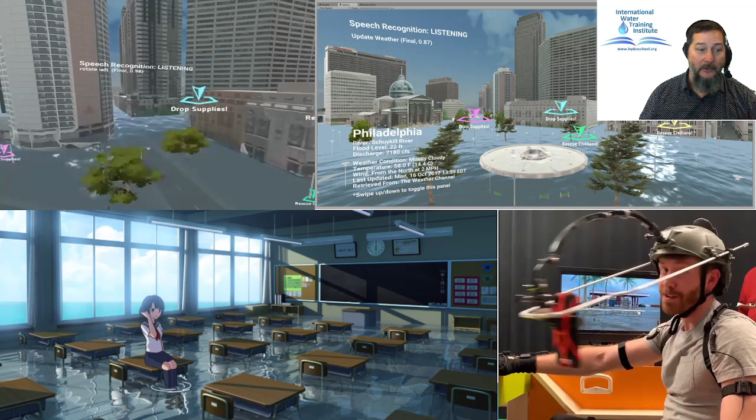One of the things I'm going to try to do with any upcoming courses is bring along a virtual reality headset that can take any flood you create and then use Google Earth or other tools to see the flood levels around you, using results exported from our own tutorial models. There are some exciting applications like this that were featured in our technology webinar last December, and I'll provide a link to that as well.

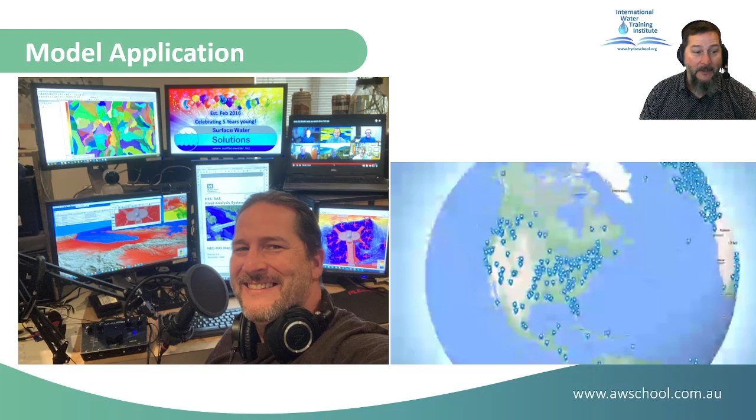Now, this being an online course, we're a bit limited for using shared visualizations. This map here shows our flood modeling webinar registrations alone, and it shows the variety of places that you may be watching us from. So wherever you're joining us from around the world, I'll try to keep this next example simple enough where each of you could do this on your own.

I'm coming to you, as you see here, from a small room that's packed full of some really nerdy stuff, but it probably wouldn't be very interesting to model in hydraulic software. So I thought I would go back to one of our earlier course locations and show you what we did there. Hopefully this location that I chose is a bit more interesting than the room I'm sitting in right now.

It's from a few years ago. I did a course in New York City, and we could actually see the Empire State Building out the window. So I'm going to use that as my example here. You can see Central Park and a few other familiar landmarks: Carnegie Hall, Rockefeller Center, Radio City Music Hall, Times Square, and there's the Empire State Building.

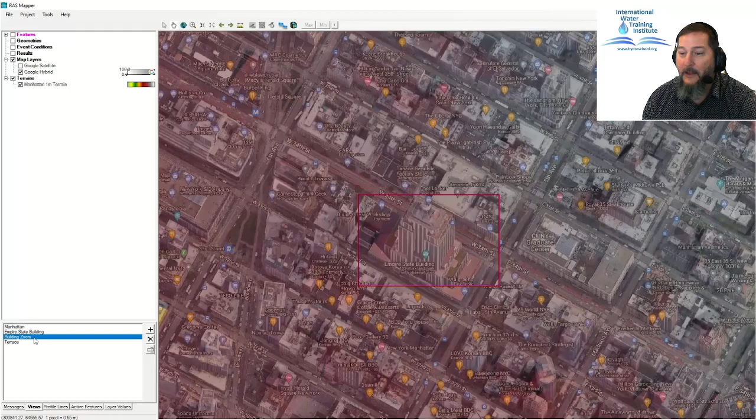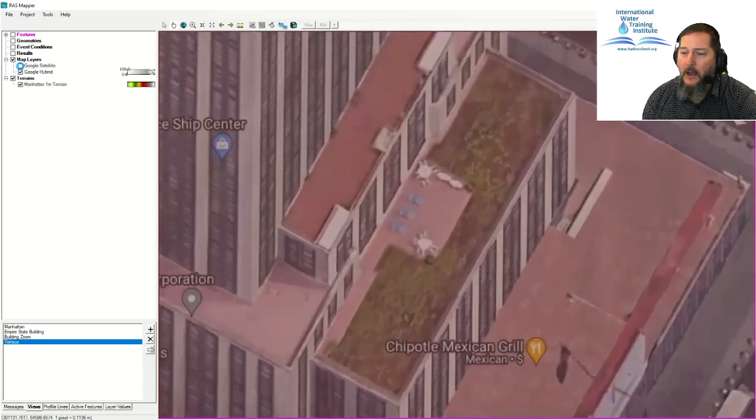So let's zoom in on that. I've set up some saved views here, and we'll go to the Empire State Building itself, which you can see. Sitting in one of these boardrooms in our class, we could actually see the Empire State Building, including some of the terraces on the side, which I wasn't aware of before I went and toured it a couple years ago.

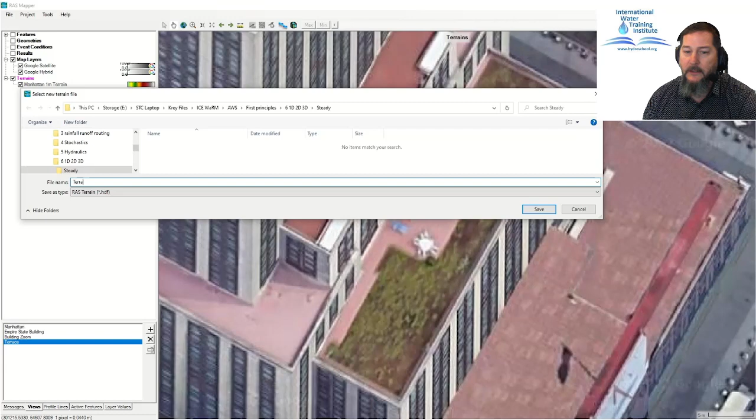So zooming into one of these terraces, let's go ahead and model this as if it's the classroom. This might be a little more interesting than just a box room. If I just delineate around the outside here, I'll need to pick an elevation. Now, I have terrain, but even if I didn't, I'm just going to create an empty terrain here. This is just going to be a new terrain layer that's only what I assign here.

So I'm going to call this the terrace, and I'll go ahead and add a new modification layer to it. In this case, it's a polygon, which I'll also call the terrace. As I draw around the outside of this, I'm going to take this polygon, and I'll have to assign an elevation to it, which will override anything that might be underneath it.

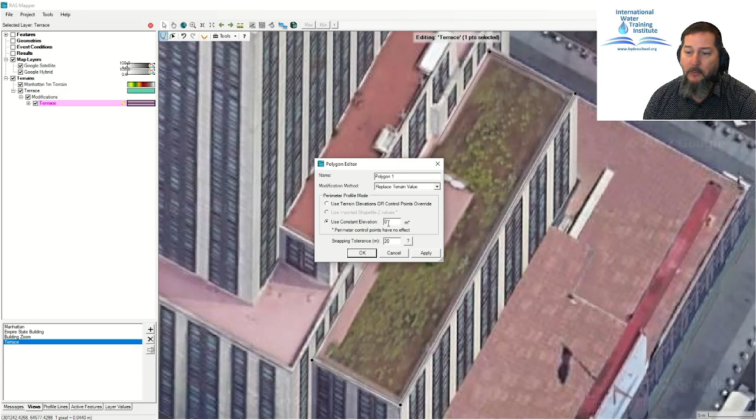In this case, it's its own terrain, so I'm not going to give it a name, but I will give it an elevation. We're about 30 floors up, so 100 meters. I'll call it even and say OK. So I've got this 100-meter high polygon.

Now what? Let's go ahead and make a geometry. I'll start with 1D, adding a new geometry here, I'll give it a name, 1D terrace, and we're going to bring some flow in one side and out the other. So I need a flow path, starting with a river, I'm going to go ahead and draw that one in.

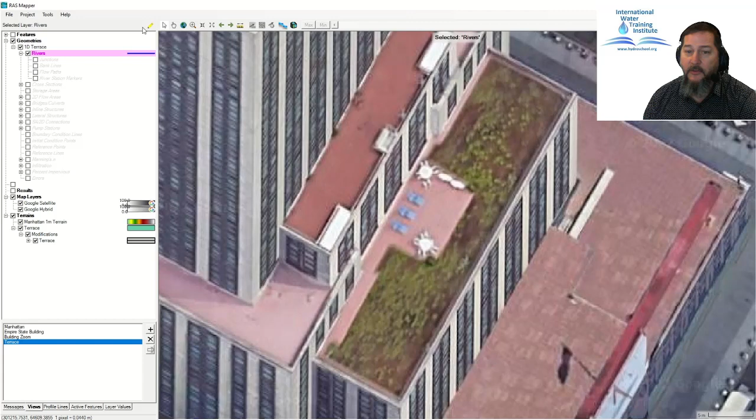And the river itself, I'm just going to go right down the center. Now this could be the center of a classroom if that's where we were sitting. In this case, I'm going to go right down the center of the terrace and delineate a flow direction. So I'll call this one terrace as well. I'm only going to have one reach, so I'll give it the same name.

Only other thing I'm going to add to this is cross sections. I'm going to keep this as simple as I possibly can. I'll put in a couple of cross sections here, delineating from left to right, looking downstream, one at the upstream end, one right down the center here, and then I'll do another one at the end. See if I can get as close as possible to the end.

Oh, that's one. Let me go ahead and move that over. I just want to get it to be 0. I'm at 39 there. I think the line is about 40 meters long. So I'll move that around a little bit.

And again, it's numbered from downstream to upstream, but I've delineated it from upstream to downstream. So the river mouth at 0 is my chainage that way, my station, and I've got 0, 20, and 40. So these things are 20 meters apart.

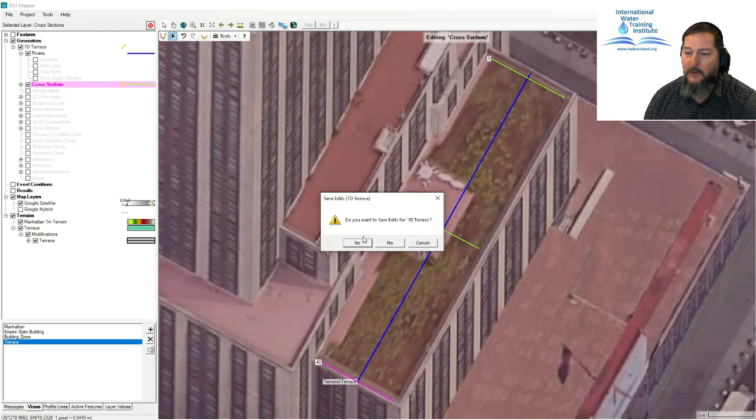I'll save that geometry, and then we'll go back in and have a look at the geometry and see what it looks like with that 100-meter high terrain surface and polygon underneath it. So when I open this up, let's see what we see here. There is the terrace, and I've got my 3 cross sections.

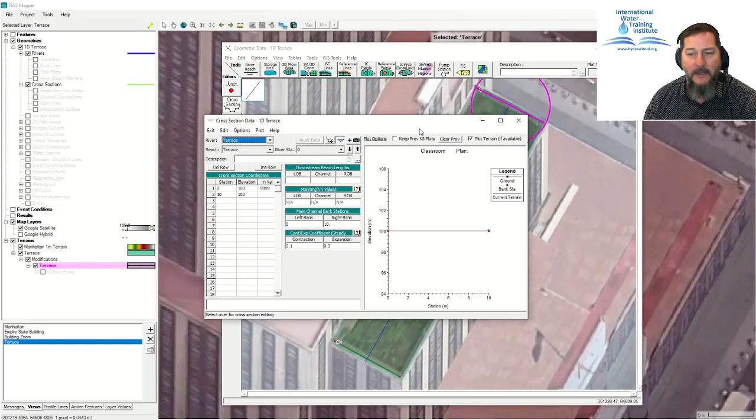Now they don't have any elevation. Each of these cross sections, they have elevation, they just don't have a slope. So they're at 100-meter elevation, each of them, and they're just dead flat. They'll get walls on the side that are automatically going to get drawn, but my profile is just dead flat. That doesn't help us much.

So we want some slope to this. Manning's equation, if we want to compare it to Manning's equation, would fall apart at 0 slope, right? So I'm going to give it a longitudinal slope, not just for the energy gradient, but we'll also get a slope this way by adding to the elevation. We'll actually get a bed slope and a friction slope, everything parallel, so that we get some uniform flow here.

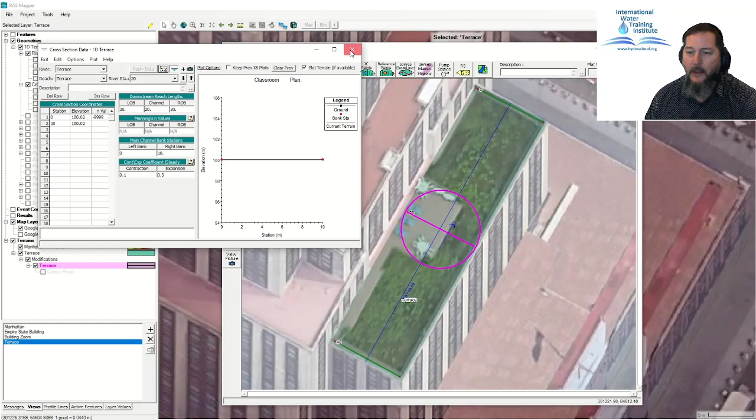So I'm going to add 4 centimeters here, because it's 40 meters long. That gives us a 0.1% slope. So in that case, then the middle one, I'm going to raise that by 2 centimeters. I'll do that manually here. And now I've got a gradient from upstream to downstream, and I will save that geometry.

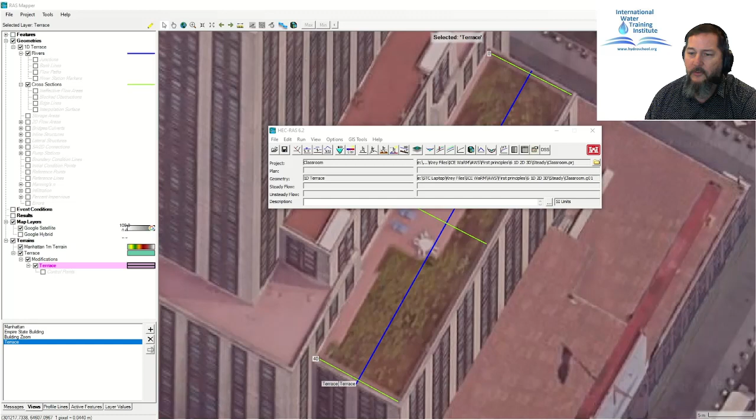Now you can see on the longitudinal slope, I've got my 0.1% moving downstream. So let's see, I'll save this as we go here, just so I don't lose anything. And then I could go in and enter steady data here. Let's go ahead and that'll be our next step.

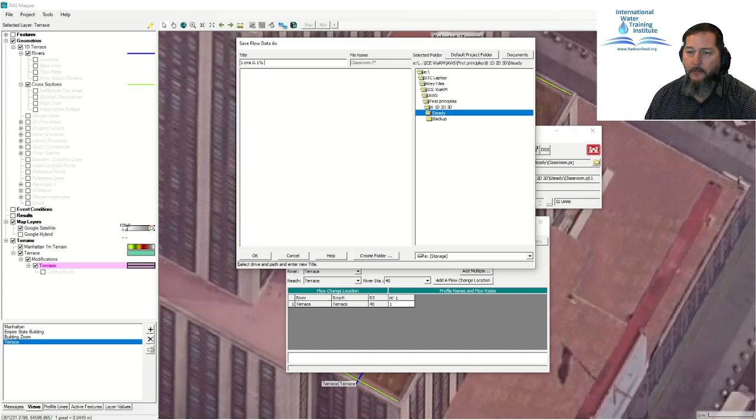Let's keep it simple, and I'll make it 1 cubic meter a second. And let's assign the outlet to be a downstream normal depth gradient of 0.001, so 1 meter per 1,000 meters, or a 0.1% slope. So I'll assign on the name, I'll give it a name that includes the flow rate and the slope, just so I make sure I keep this separate in case I make any changes later on. So 1 cubic meter a second at a 0.1% slope, and that's my steady flow.

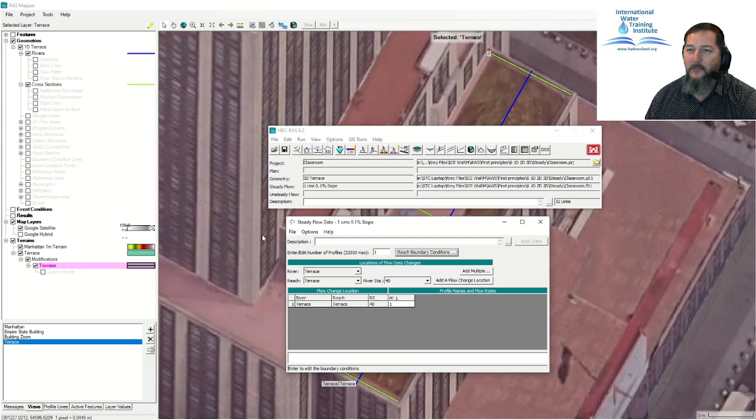So let's see, there's one thing before I run this. I guess one thing we need to talk about is the roughness. So I haven't assigned the roughness coefficient yet in this model, and so I'll need to go back in and do that. What should we make this out of? I don't know, smooth dirt, grass, turf, astroturf, whatever they might have out there, some gravels. Let's just choose an intermediate value.

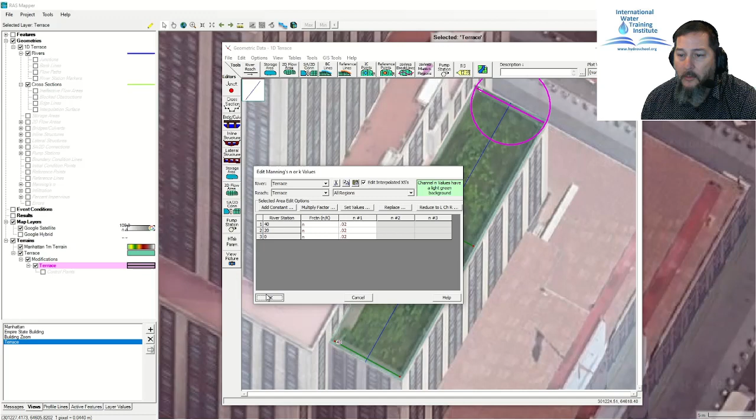So I'll need to click on the geometry here and open up the cross sections, and I'll do it through the table. It's got a no data value assigned to it to begin with, so we'll make it 0.02 friction. We can look up the tables to see what might be reasonable and run some sensitivities, but we'll keep this pretty basic for now.

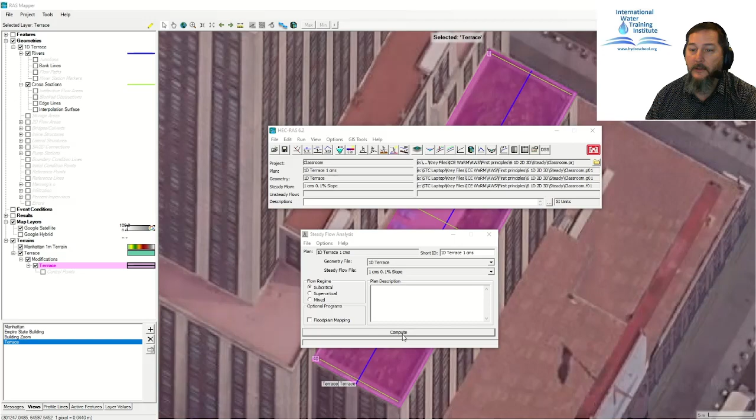So I can see now, if I turn these on, there are 3 different cross sections at 3 different elevations, 3 different levels. I'll save my geometry, exit out of that, and let's compute it and see how quickly it goes, because that's one of the things we're testing today, the speed. This one took less than 2 seconds to run, so almost instantaneous.

Let's look at the profile now, and you can see I've got a slope there. Now that should be parallel, but I've only got 3 cross sections, so there might be a few discrepancies in terms of how parallel that is. It's dead flat across the top.

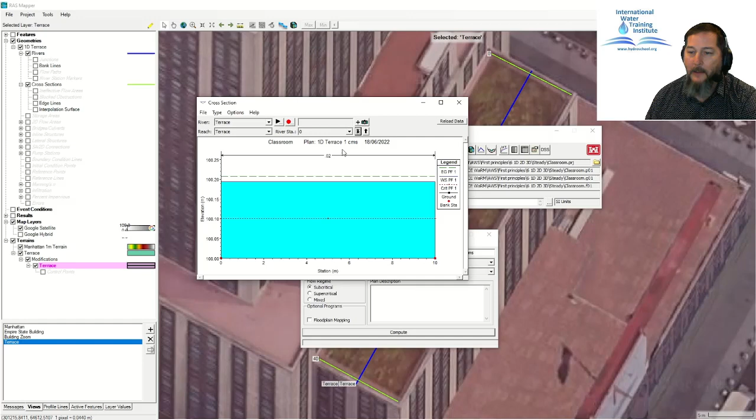You can see that I'm below critical depth there, so this is a subcritical run. There's critical and my water surface, and if I check the tables here, I can see my Froude number is 0.37, and the water surface is about 20 centimeters deep, which we can check later to see if that makes sense. Velocity is 0.5 meters a second.

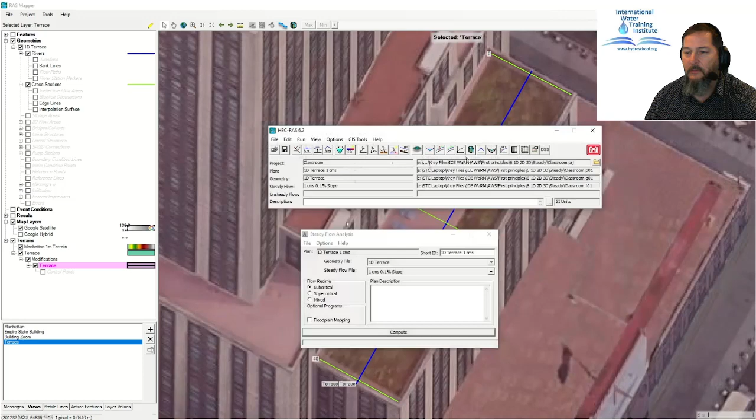So that's my uniform rectangular channel running down, with water pumped in from the upstream end and flowing out the downstream end at a 0.1% slope. So there's my depth, and you can see that flow profile in the results.

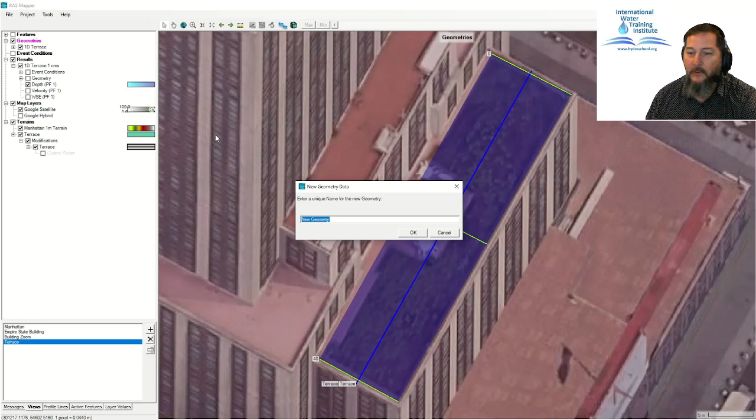And now let's go ahead and do a 2D terrace to compare. In this case, I'm going to add a grid around the same area, and for the perimeter, I could just make a shapefile out of this and use the same one that I had used to delineate my 100-meter high elevation.

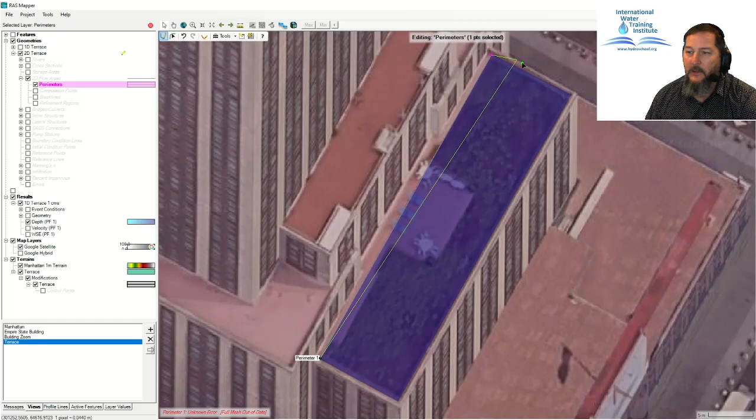I'll just fudge it in here and get it as close as I can. In this case, this becomes my 40-meter by 10-meter terrace that I'll run some flow across. So the perimeter itself is going to get the same name. I'm going to keep this as large a cell as I can, just to demonstrate the purposes here.

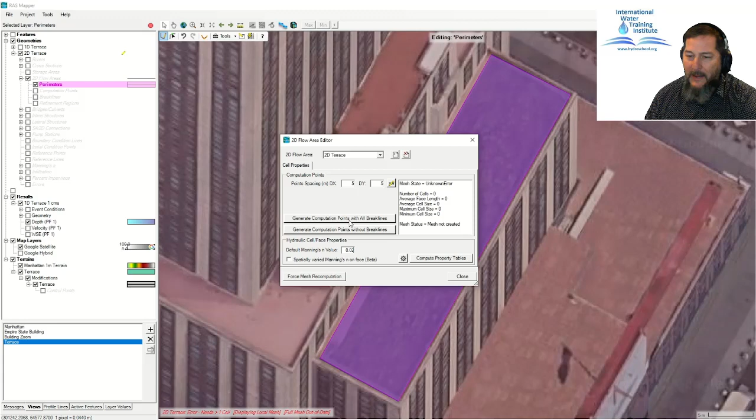I'll make it 5 meters, match the Manning's n of 0.02, and we'll generate this. This is not going to come in orthogonally, but I want to make sure it's oriented in line with the same flow direction as the 1D model.

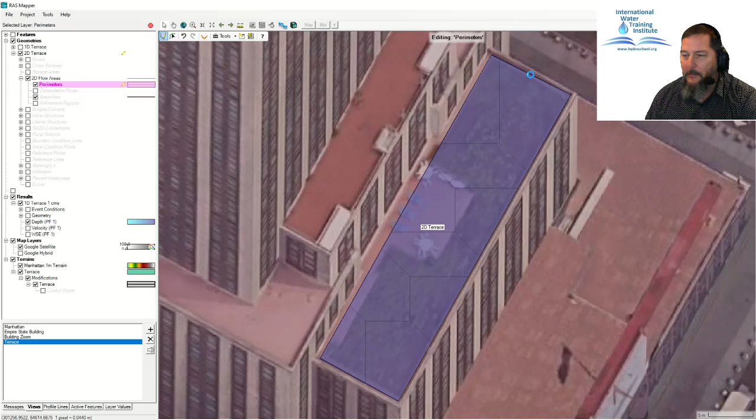So I'm going to go ahead and put a break line down the middle of this, maybe just for reference. I'll use the 1D alignment here and turn it on so I can match that. So again, I'll take a break line right down the middle, and I'll give it a name. This is going to be the center line of my terrace, and now I want to orient everything along it.

So what I'll do here is give it some near repeats, because near repeats will allow us to orient in any direction we choose instead of being orthogonal, even though it looks like it's 3D. So I'll give it a few near repeats.

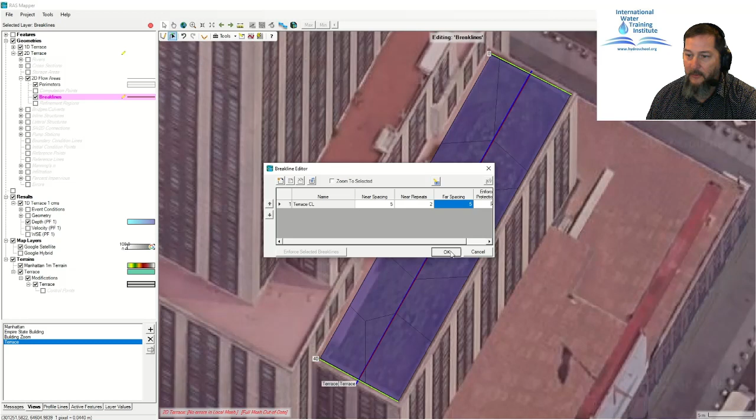Far spacing I'm going to keep the same, and we'll enforce that here and see how many we get. The dots, let me just remove those couple in the middle, so that we can get this thing lined up the same way as the cross-section alignment.

So now I've got 1, 2, 3, 4, 5, 6, 7, 8 on one side, 8 on the other, 16 grids. Not necessarily a robust 2D model, but this should give us enough to compare to when we look at the 1D results.

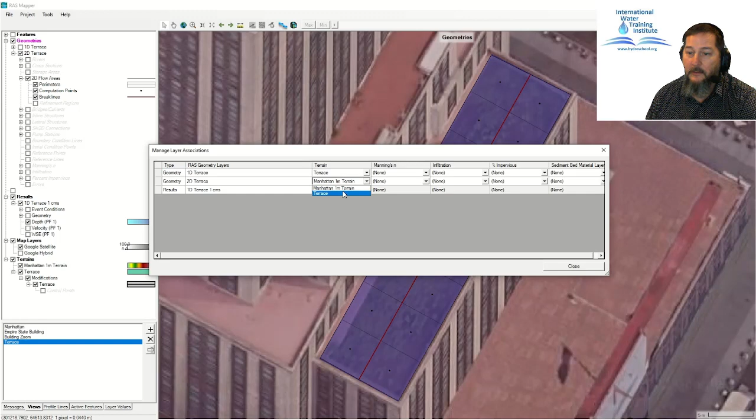So for our 2D flow area, let's go ahead and associate this with the proper terrain in the background. This is now going to be the terrace terrain, not my ground floor terrain, which is what I've got as the basis for the rest of the model. This is just that 100-meter high grid.

So as I scroll along there, you can see the elevations vary. I've got varying elevations that are 4 centimeters higher on the upstream end, and now that I've associated it, it's automatically going to use that one.

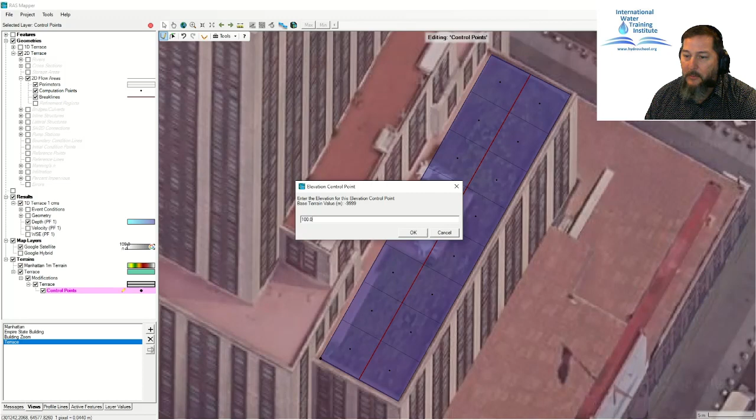Again, now I need to assign control points along the outside here, and I'm going to put those in at 4 centimeters higher because I just realized I hadn't sloped this yet. So I'm going to give this a slope.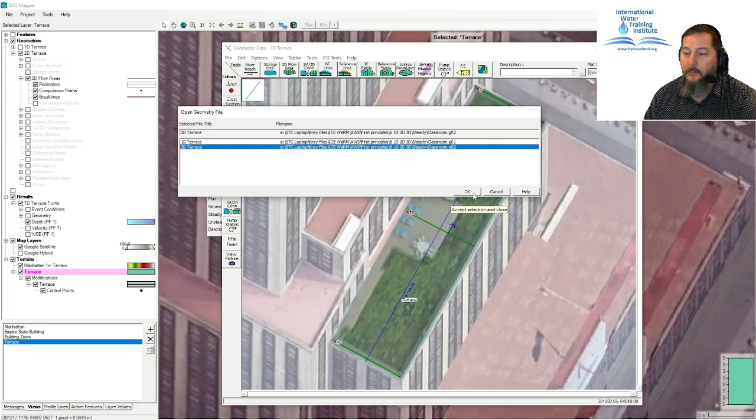Those previous elevations were even, yeah, now there we go, 2 centimeters in the middle and exactly 100 at the end, so I'm 4 centimeters higher. And I've done this with control points. This way, if I open up the 2D geometry, we'll be able to see how that has now been sloped, so that 100-meter surface is tilted upwards with a 4 centimeter rise, a 0.1% gradient underneath it.

So those cells will then be computed based on that terrain data. Now I need to add some boundary condition lines, the upstream and downstream boundary condition lines, inflow coming in from the bottom, outflow going out from the top right there. And if I pull this across and give it a name, I'm going to assign the same slope on the upstream and downstream side.

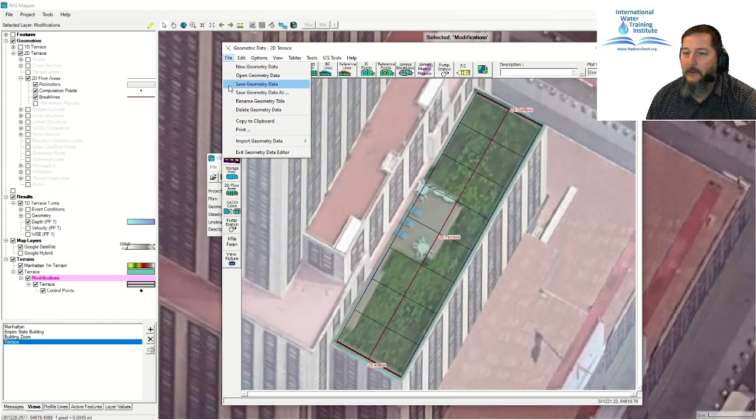Let me save this, I always like to save the geometry along the way. You just never know when you might lose it. And I will save the plan as well, and the steady flows as soon as I get those in.

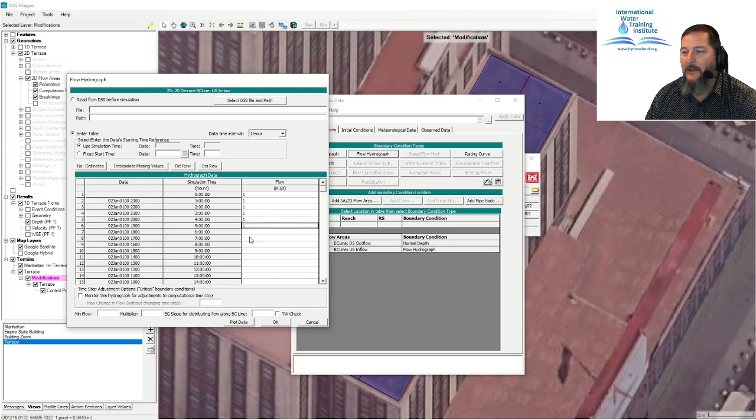So normal depth on the downstream side is going to be 0.001, again 1 out of 1,000, and then the same on the upstream end. I'm going to bring in now the 1 cubic meter a second all the way down. This shouldn't take long - how long does water take to go 40 meters? I don't need to go out to 5 hours, but I'll put those numbers in case I extend things later on.

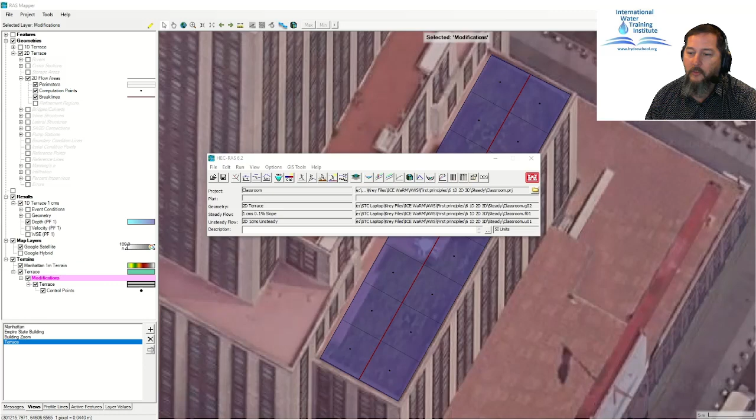So I'll save that unsteady flow data. Let me give it a name here - this is going to be, again, 1 cubic meter a second, and this is now unsteady. So I've got to run an unsteady - I don't have the option in 2D of running a steady flow. So now I've got an unsteady 2D run to compare my 1D steady flow results to.

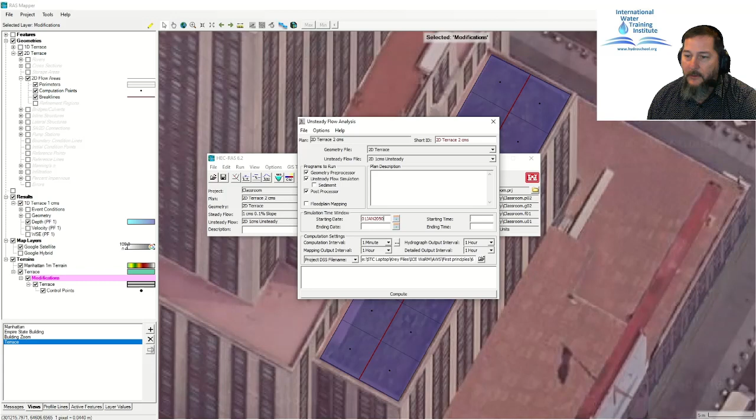So I don't need the post-pro. I'll just put all these on for the sake of consistency with the others, and I'll make this my 2D terrace, and we'll put this flow in. I'll just copy this across to the short ID, and we will run this one. I'd like to put these in the future after my retirement, so I know it's a hypothetical event, and we'll just run this for 2 hours, much longer than we need.

So what's going to happen here if I save this - well, let's see, 1 minute. If we think about our Courant criteria, that's going to be quite long, so this thing might blow up on me. Yep, let's look at that - 147% error. Yes, that was way too long for a 5-meter grid. I can't go with 1 minute, so let's change that.

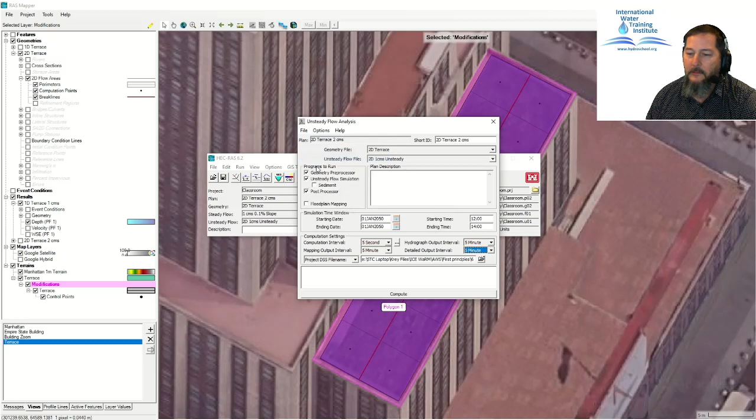Thinking about how far it might go, how fast is this going - 0.5 meter a second. We'll give it a Courant number of less than 1 here, and just allow it to move from one grid to the other, and see if that makes a difference. I'll change my output a bit so I can see this cycle through as well, and we'll save that and compute it. Now we've got a run that hopefully has got - yep, smaller mass balance error, pretty much negligible.

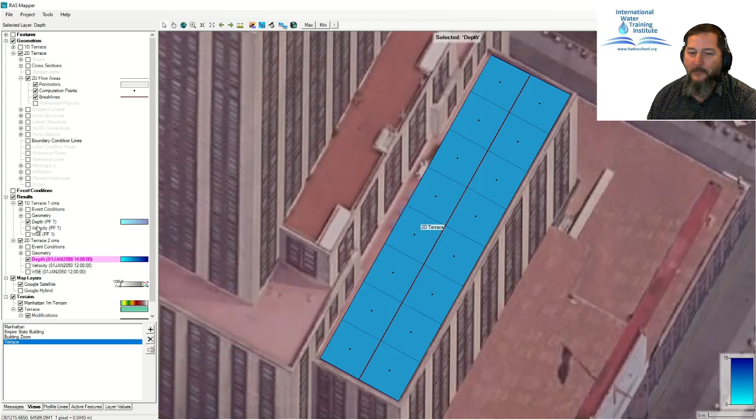So now I've got 2 sets of results that I can compare, based on this 2D model. It's not great - it's got 16 grids. How many 2D models have we ever built that only have 16 grids? But as it's cutting these sections for a rectangular uniform channel, it's going to be just fine.

So here's my flow paths, my particle tracing - you can see it running from one end to the other. Again, a bit gimmicky in this case, but it does show us the flow directions. So I should have called this 1 cubic meter a second - I'll go ahead and rename that in a bit here. But let's try running it.

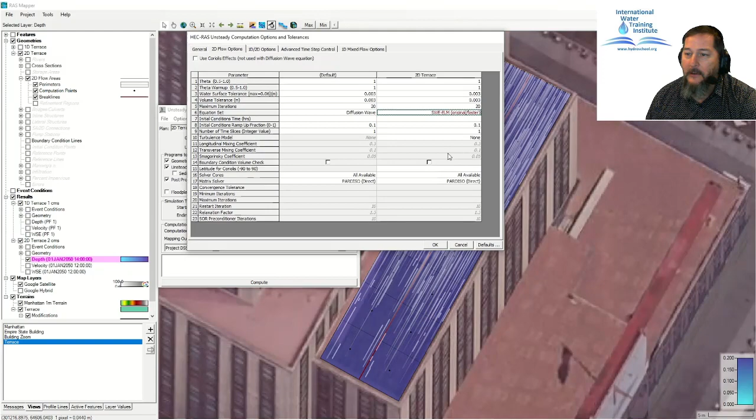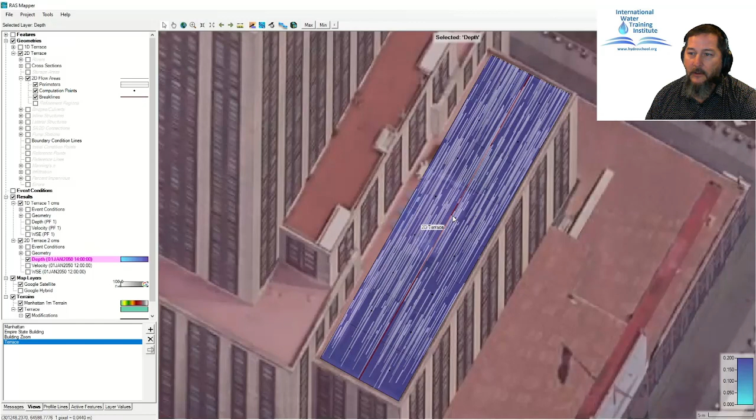That was diffusion wave, the simplification, just to prove to ourselves that it doesn't make a difference. My depths were 19 centimeters before. I'm going to run this now as a full momentum, the shallow water equation, and let's see what we get. We got a little bit bigger mass balance error, but when I check the results - let me turn off the particle tracing - it's still 19 centimeters deep. Same thing, it didn't make a bit of difference whether we ran full momentum or diffusion wave.

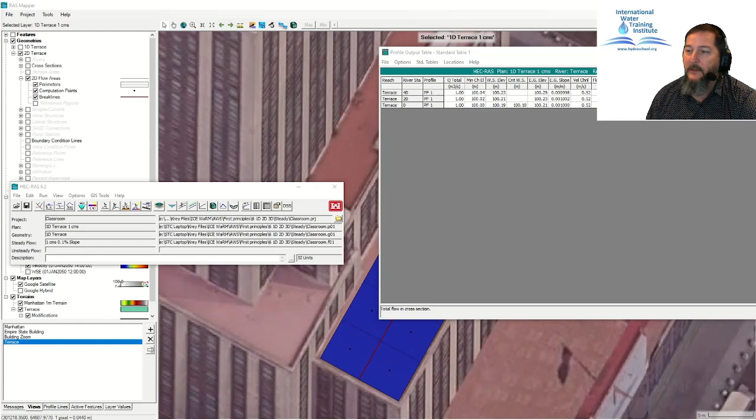And likewise on the velocities, those are going to be consistent at 0.53 as well. Oh, for the 1D, let me go in and check, and we'll go back and compare that to the table - you can see, oh, the velocity is 0.53 instead of 0.52. You can see how the depth's changing a little bit there. If I inserted more sections, that'd be the same.

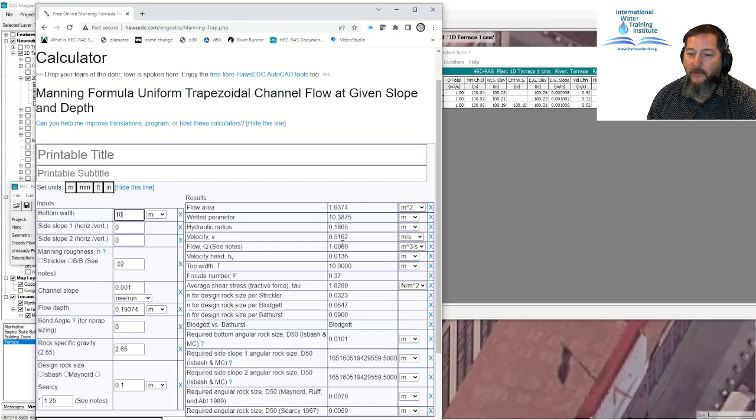Let me just type this in - I've got these values that I already put into an online Manning's calculator, and you can see with 1.0000 discharge in my Q and the same channel slopes, I get 0.19374. So that just shows us that we're matching. The velocity, yeah, 0.52 - so we are right on. How well do we ever know things to 1% or less?

That's probably more accuracy than we're likely to find anywhere else. And again, there's going to be more uncertainty in our Manning's roughness.

So let's go ahead and now change this 1D to an unsteady. I'm going to go ahead and save the unsteady data here. Instead of 2D, this is now going to be 1D. Let's see if our steady flow and unsteady flow give us any differences.

So I'm going to give exactly the same boundary conditions as I had for my 2D model. Now I've got 0 at the downstream end. I'll give it the normal depth, again 0.001, that's 1 in 1,000. And then at the upstream end, I'm going to give it the same thing, the flow hydrograph.

What if we wanted to ramp this up? I think we've talked before about how flows need to ramp up gradually in HEC-RAS. It doesn't like to just start with a massive amount of flow. Well, what would happen if we just ramped it from 0?

I'm going to save this one and also save the plan. This is going to be a 1D model with unsteady flow. I'll put that in the short ID as well. And then we'll have this one saved.

I'll turn on all the same features here and try to make it similar in the run the simulation window. So going 2 hours worth.

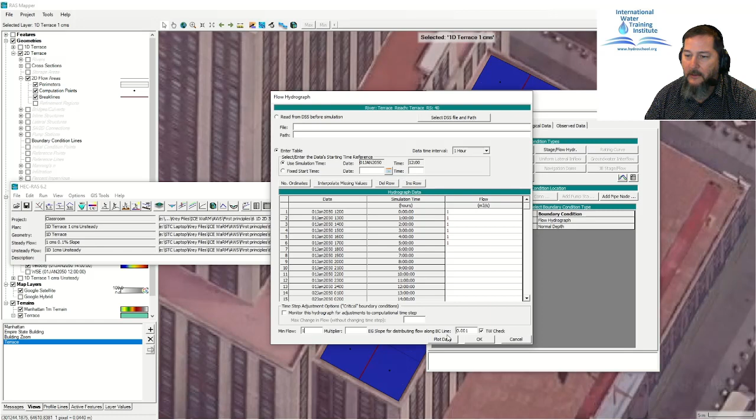You could also instead, even if you had some flows going below it in the beginning, we could assign an initial flow here. Wherever you want to assign that, we just need to override the 0. We can't have a 0 flow in this case.

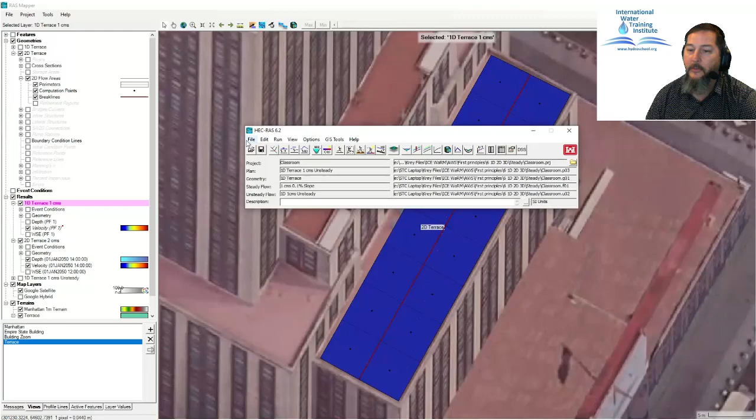And so when I now hit run and hit compute, I should hopefully get some results here that are going to be a bit more reasonable than 3 seconds. So it took a little bit longer than the steady flow, but only by a second or so.

So let's have a look at these results. Let's pull RAS Mapper back up here, and we've got unsteady results and we've got steady results. And if we have a look there, now here's my 1D unsteady. Look at that, exactly the same, 0.19.

What do you know? Well, but velocities, I think there might have been some instabilities in there. So let's go back on the velocity table, because it's going to track all of your any instabilities you might have had along the way at any computational interval, not just the output intervals. But let's go ahead there and have a look then at the table and see if we can get those results for the 1D unsteady.

Yep, it's the same. So you can see it's actually matching exactly the same for my water surface elevations as the steady run. So I've got these 3 runs, steady and unsteady for 1D. 2D I can't run as steady, so I've just got the 2D shown this way.

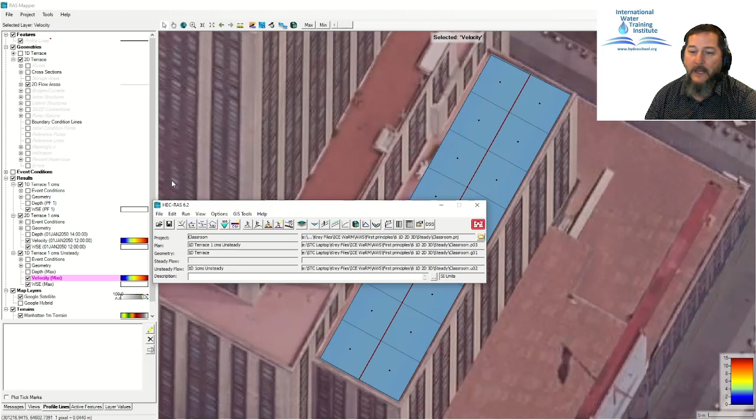Let me just save everything and go back to my results here, and then we can maybe plot a profile of this and see if we can compare our water surface elevations.

Again, there's my particle tracing, just showing the direction that it's going in. I'm going to plot this.

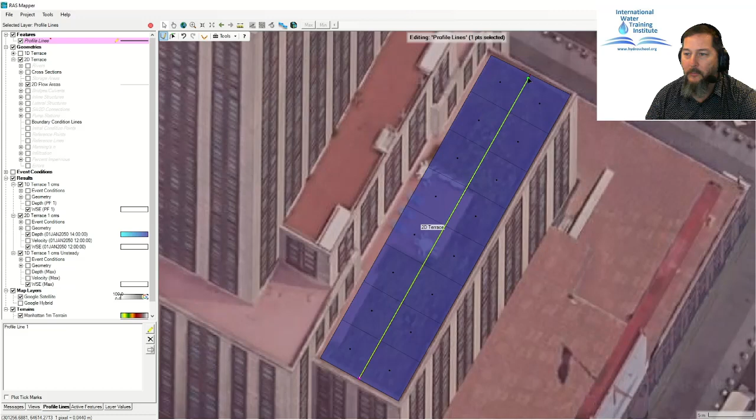Usually I like to just grab my center lines off of a shapefile and import those so that they line up exactly. In this case, I'll just fudge it in again and go right down the center line of the terrace as a profile. So when I do that, I'll go ahead and make sure I'm turning on my maximum water surface elevations.

I can check each of these 3, and when I plot them out, you can see there's a little bit of a difference. Is that because I had such a wide grid spacing and cross-section spacing?

Well, you look at those axes there, each of those grids is 1 millimeter. The fine grids there is 1 millimeter apart. So it's still pretty close. There may be some conceptual differences in how these are handled.

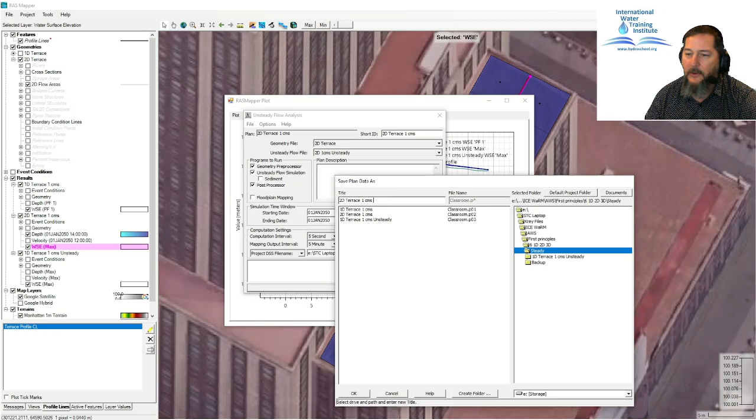You can see it's actually a bit closer right at the end. So just to check ourselves, let's see what happens if I take the 2D and maybe the full momentum versus

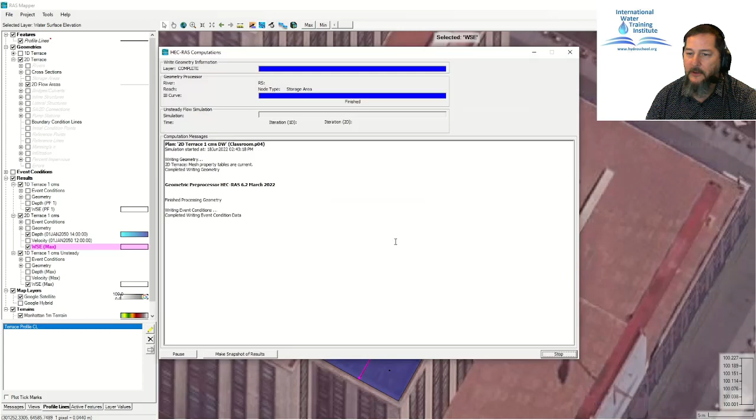diffusion wave. Let's go ahead and save that one again. I didn't save it last time, just right over the top. So I'm going to change this back to diffusion wave and call it DW. With this one called DW, I'll save this plan and run it, and now we'll have an extra profile to compare. Let's see, is there a bigger difference between 1D and 2D, or between 2D in diffusion wave and full momentum mode? Well, let's have a look here.

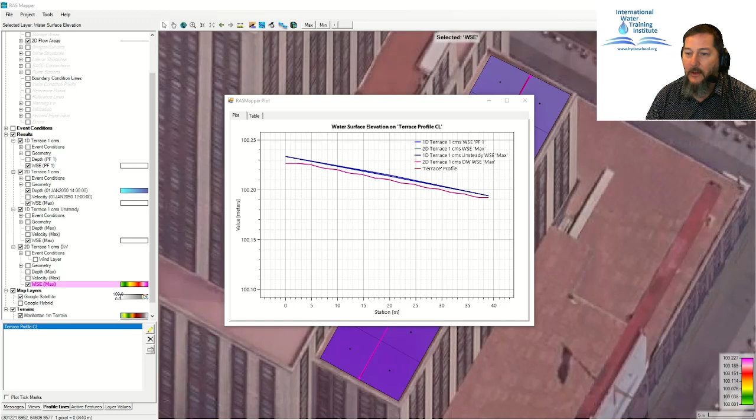I'll close that out and add that to the profiles, and what you'll see here is that my two 2D ones, I think, because it's uniform, shouldn't be much difference at all. Okay, it's not even a millimeter, so it's well within the accuracy of the model here, the reliability of the model results.

So with that, let's go back again and just look at the geometry. Maybe the grid size, maybe refining the grid size. Did we get to convergence here? Would we get to convergence if we change this, say, to a 1 meter grid instead?

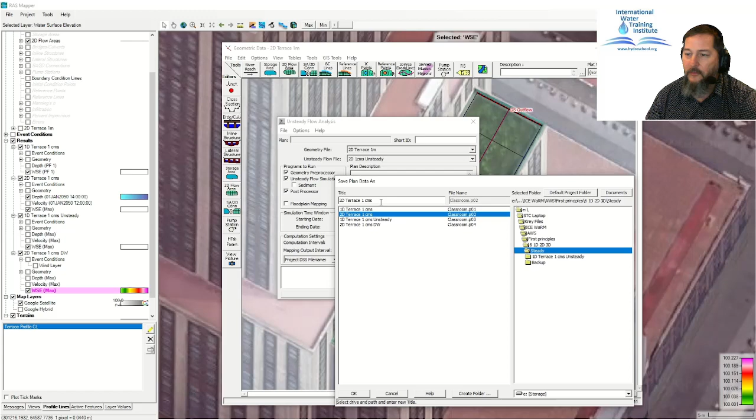And I could do the same with cross sections. I'll pop those results in later if I can generate some interpolated cross sections. But right at this point, let's just go in and just change the grid to 1 meter.

Now with the grid at 1 meter, again, that's going to be 5 by 5 meter ahead there. So that's 25 cells for every one we had before. So we've got 25 times more grids. And so with that 1 meter grid, you can see those ones.

Let's see, I'll turn off that one and turn on the break lines here. And what I'll do is use that same break line, and to get them oriented in the same way, I'm just going to change it to 1 here, and now I'm going to need some extra repeats.

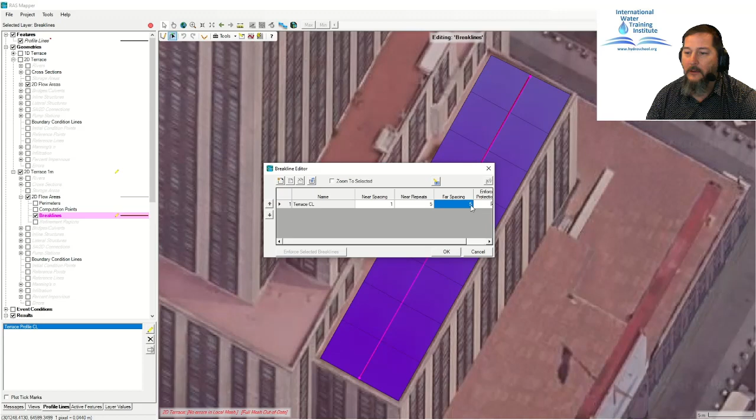So a 1 meter near spacing, and I'm going to repeat it at least 5 times, and that way on both sides of it I'll have 5 1 meter grids. And that should, if I go in and enforce this one, hopefully they'll line up with my center line. There they are. So there's my 1 meter grids.

So I'll save that. And it's still not going to run for very long because it's still a very small model, but it will take a little bit longer to run this same model here.

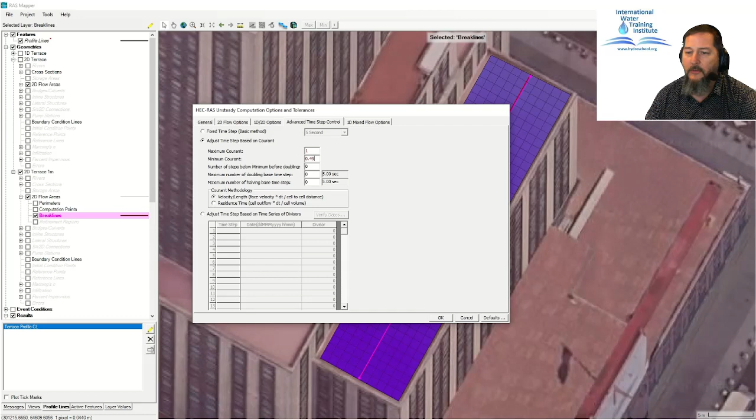And let's just see what happens if I even take this down and let HEC-RAS adjust the time step here. And let's assume it's explicit and has to be below 1 as the Courant number. That'll give us our most stable results here.

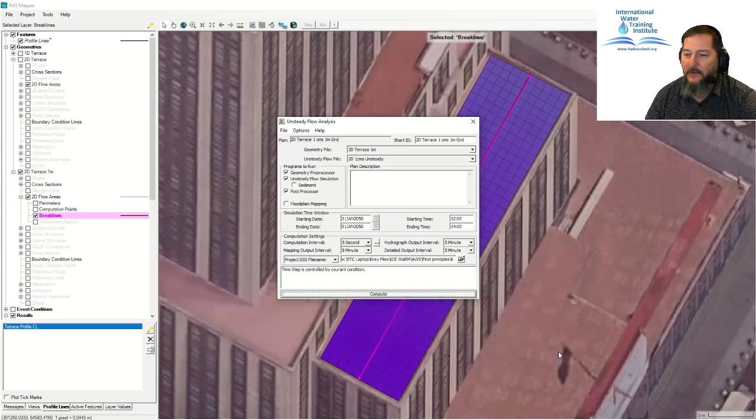And as I run this thing, let's see how much longer it takes. Yeah, a few extra seconds. So again, not a whole lot of grids in this one, but as I load this in and have a look at the results, let's see, did it help us? Did we get to some sort of convergence?

So I'll go back and turn this new one on. Right click on this and hit my water surface elevation. Okay, so what made a bigger difference? Well, there you can see the two 2D results and then the two 1D results up above that.

So, maybe I got more accurate with the 1 meter spacing, but in the end, what you can see is the 1D results use exactly the same, steady or unsteady, has exactly the same boundary condition. Likewise, the 2D to the millimeter is exactly the same at the boundary condition. It doesn't begin to diverge until after that. And if you look at these results here,

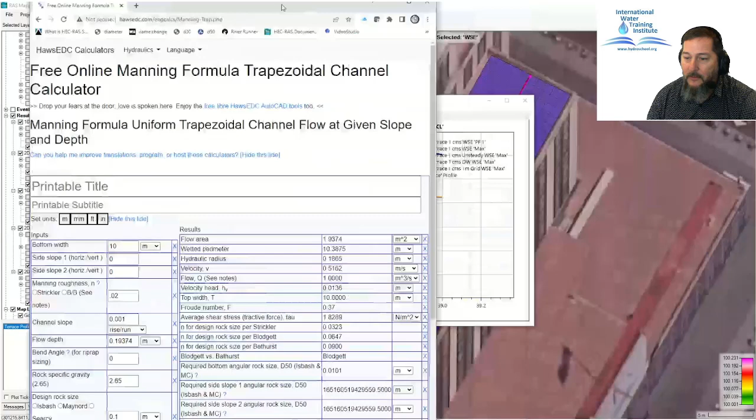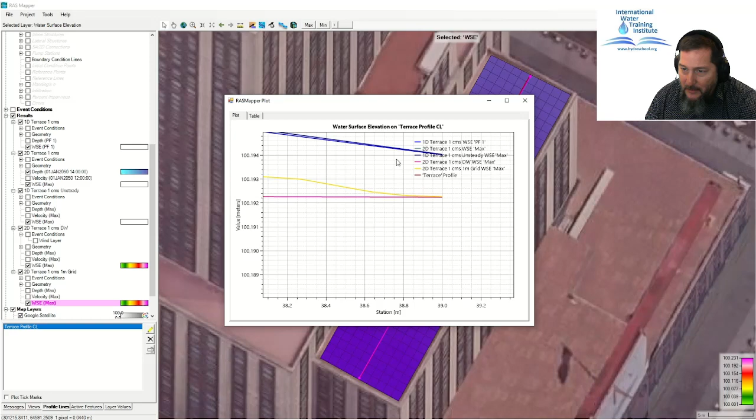19374, it's right in between the 1D and the 2D results. I've done the same on some of these ones where I took the cross section spacing in the 1D and interpolated those, and it actually makes a smaller difference than anything else. They end up right up on top of each other as well. So upstream there's about a 1 millimeter difference if I try this with interpolated cross sections.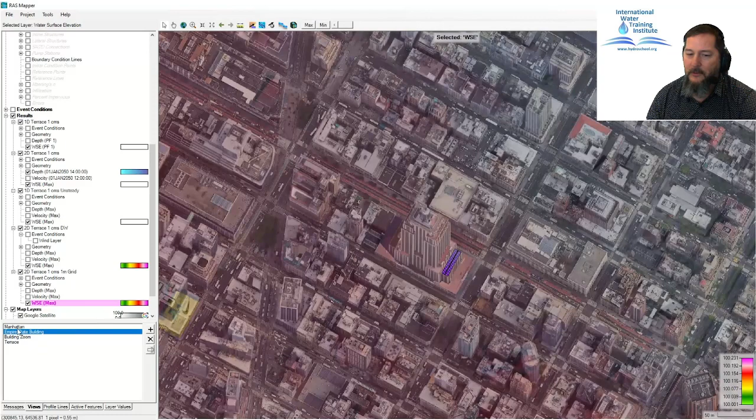So let me zoom back out on that. This was our Empire State Building tutorial. You could do this with any classroom on the planet. This is what we do, and then I can kind of walk around and see that and see what's going on. So that's when we're looking at a uniform mild gradient channel, the approach we take shouldn't really matter.

Now that we have the model all set up, we should be able to test out all the different principles and the sensitivities and parameters that we're covering in this course.